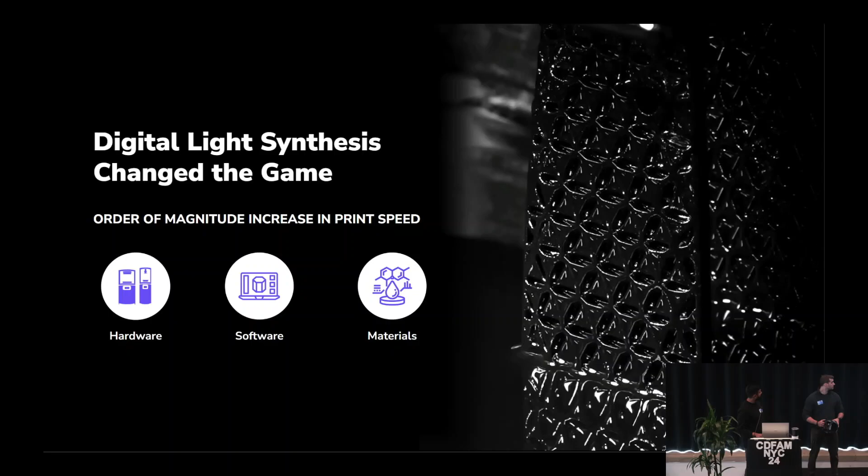So what we are going to go over is how we both worked with CCM to bring their custom helmet to scale. So a little bit about our background at Carbon. We have industrial hardware, design software and automation software, and engineering grade materials that all work together to build unique products in different spaces, from consumer to oral health, to protective padding, things like that.

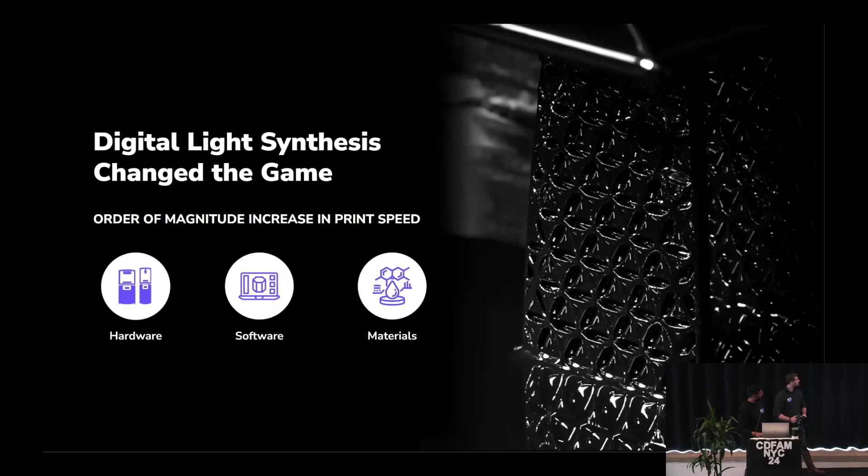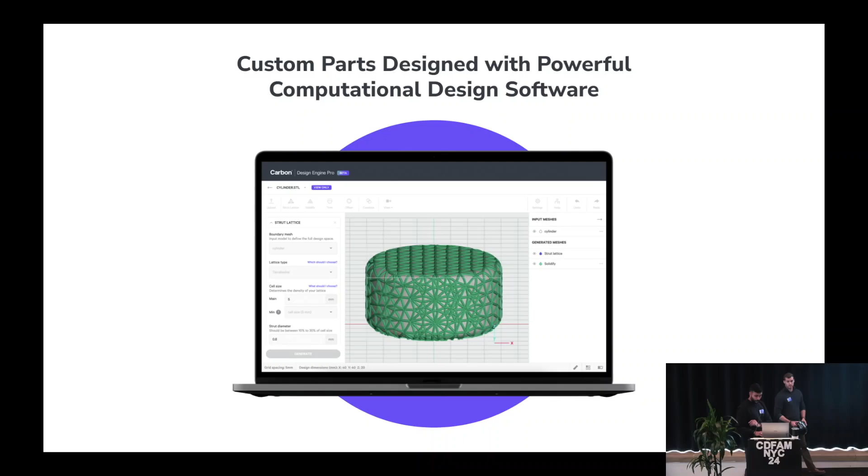So our vision at Carbon: we're really proud of all the products that we brought to scale, but we want to start moving more towards mass customization, to bring products to the masses at scale and build tools that are repeatable across different products and industries. So bringing it back towards CCM, we'll walk through it almost as a small case study, at least for our sections.

To be able to do that, you need innovations in computational design tools. You need to be able to bring in the custom inputs, you need to be able to automate, you need to get data and understand what's going on during the process. You need high performance materials that make sense economically for the customer, but also provide lightweight needs and fast print times. You need a true one-to-one product pipeline, right? To understand, hey, what's that scan data coming in? How do you use that data? And that's what the experts at Toolkit3D do.

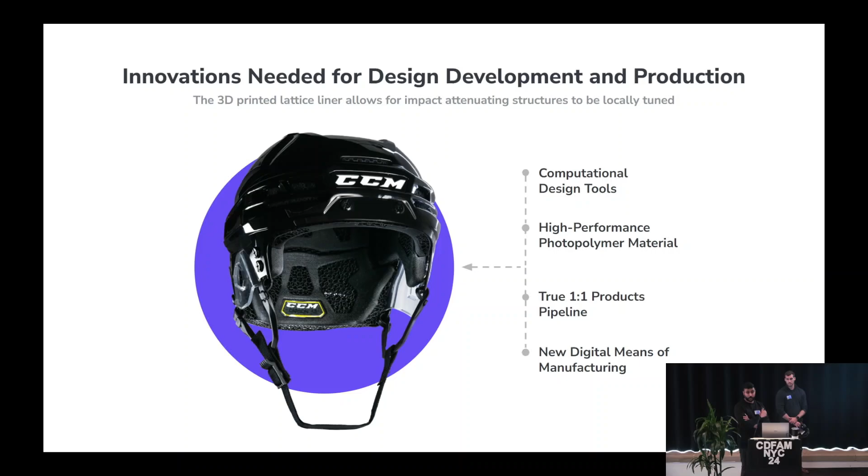And a new digital means of manufacturing, right? You need to trace that product through the system. You need to pack it. You need to put it on a build and make it efficient to print. So on a high level, I'm going to go through the design side of that CCM helmet. So where do you usually start? Some of you might have seen this in Slice Lab's presentation: a great place to start is understanding what lattice to use.

As applications engineers, you provide us with the material, we characterize it, and then we can use the thousands of lattice library elements that we have to narrow down what lattice might work for you. And this is available to all our Design Engine users. It's a mix of experimental data on lattices and simulation data, and then we fill in the gaps by interpolating from both. We've also recently plugged in commercially available foams as well. So if you have something you're already working with, you can understand the compression curve and find what sort of lattice works best for that.

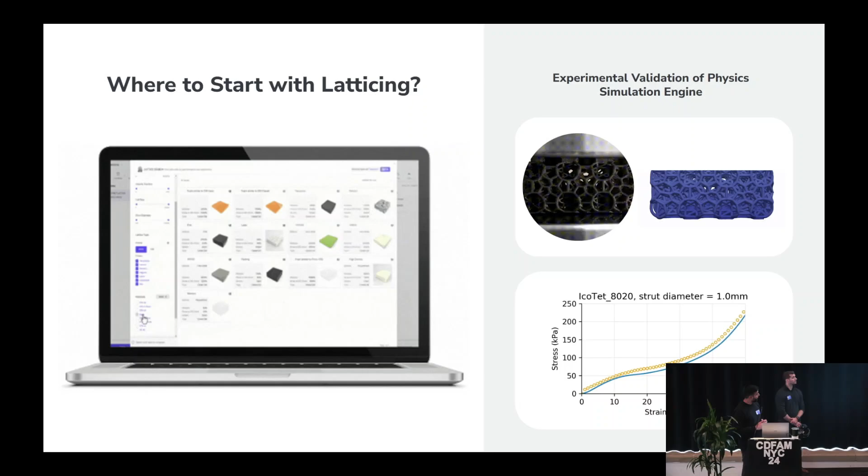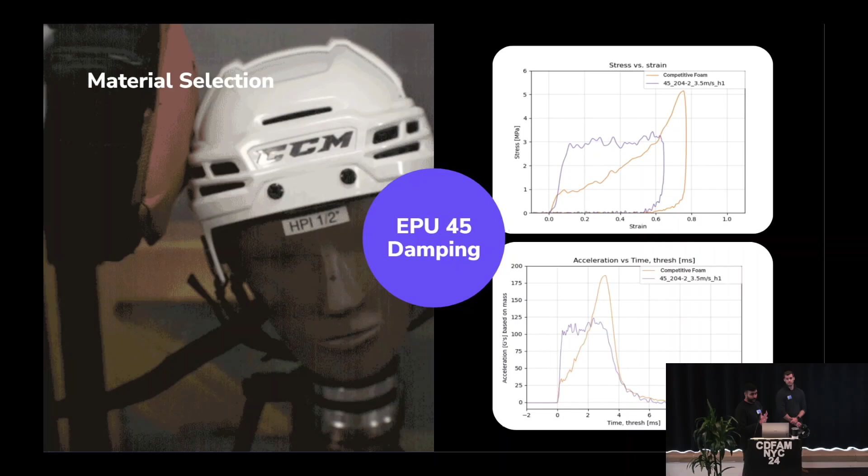Hand in hand, when we're trying to figure out what lattice works best, or at least narrow down the scope, we're figuring out what material also works best. For this project, it was a little bit easy because we have been developing EPU45, which is our premier dampening elastomer. It's strain rate sensitive.

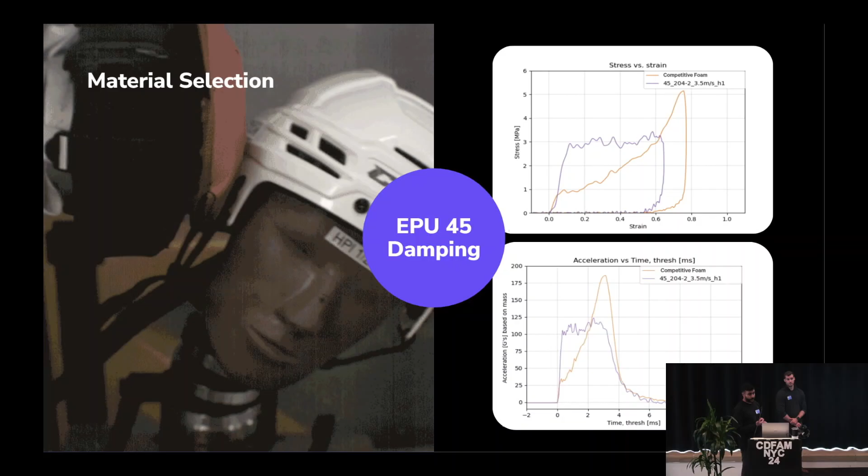So it was a perfect fit for this project. With this elastomer, we've actually been able to improve printability from our previous EPU 42, and we cut the print time down by over 70%.

Once you understand what material and what lattice you're going to use, we have to start tuning that structure. Within Design Engine, we've been able to use our advanced strut selectors. One example: we get the head form of the player, and we can understand what's normal to that head form to know where you can and cannot change strut diameter, where your performance struts are, and where you have other struts you might be able to cut down in terms of weight. So we reduce struts in the non-normal direction to bring the weight down for a player.

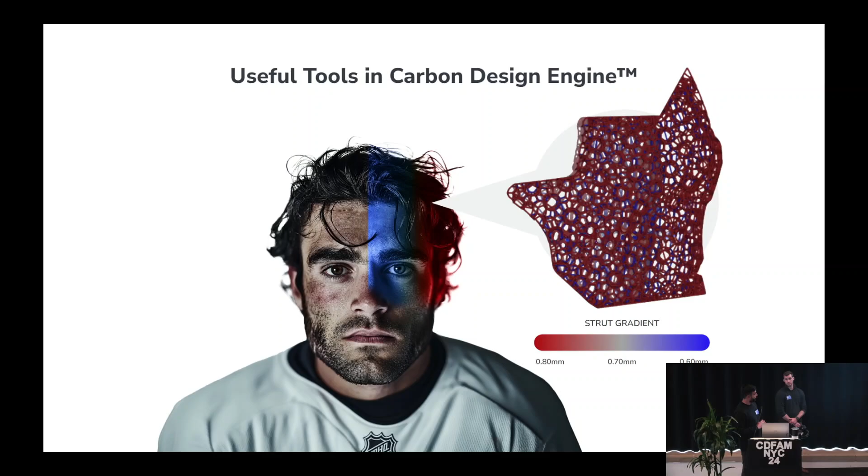Another thing is automation. In this process, you're working through a bunch of iterations. You have different scans coming in from the customer of different players that they want to test and iterate through. You need a quick way to do that versus starting a new project each time.

Within Design Engine, you can have a drop down at the top. You can tokenize your inputs, select the input, give it a token name, and download a script. For the CCM project, I've used that and built my own Python script on my desktop using this as a starting point, to be able to just run through helmets and helmets.

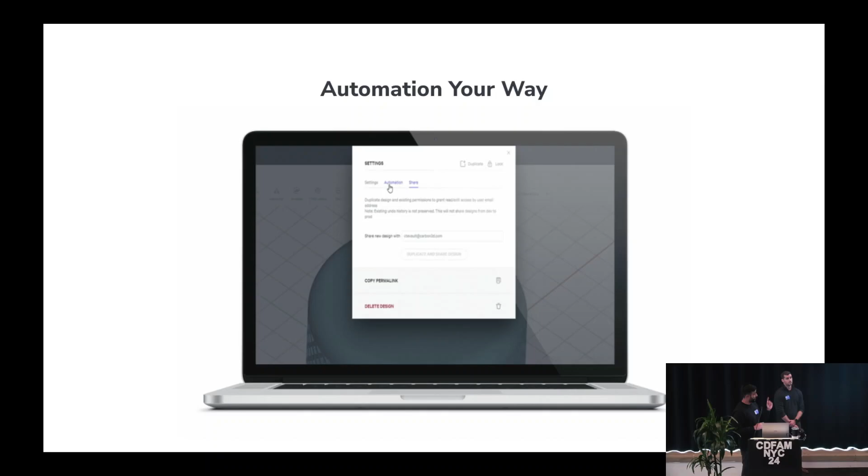And these helmets get very complex. From Toolkit3D, who processes the scan, we have 7 different inputs coming in for a goalie helmet. The goalie helmet has 14 different pads and comes in 3 different sizes. So you need a way to reduce the design time and iteration time, and improve efficiency.

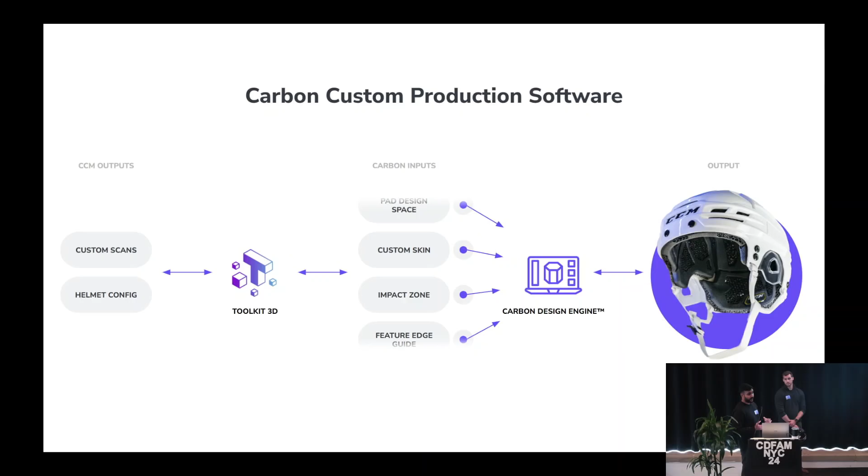And then you can imagine when you build this into an actual production workflow, the complexity you have to build in there. That's why we rely on people like Toolkit3D, who's our premier integration partner. We handle the design, lattice generation, and the print and production side of things, and they interface with us through our API to bring everything through for the customer.

So yeah, I'll pass it off to Jean-Philippe.

Perfect. So first, I'll take us one step back to show the initial input we had at Toolkit. In that project, we were both brought in independently, Carbon and Toolkit, by CCM. Basically, we were both pieces of the big puzzle that we needed to solve.

On their side was designing the pads, making sure they're printable, and following the guidelines for testing. On our side was how can we follow some guidelines and make sure that every single time we receive a scan of any player, we're able to generate the volumes adapted to their head, and stay within the constraint for morphing.

So it can be either maximum thickness and minimum thickness to stay within test standard, or it can be printability assessment, making sure some surfaces are flat so they stick properly, we don't have overhang, or don't need any support, so we can optimize the print as much as possible. That came as our design engine.

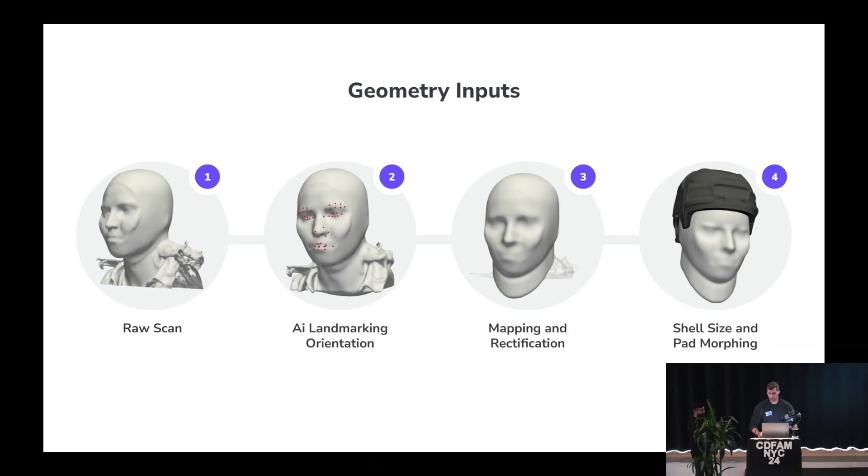So basically what we're able to do through our rectification and measurements, first we're going to fit into the right shell, hopefully minimizing the pad thicknesses to minimize weight. Then, following the match to the right shell size, we're going to be able to morph the pads to properly fit your head. The pads are comprised of course of the volume, but also their skins for sweat and comfort that are morphed at the same time, and then pushed to the carbon design engine.

This is all fun and everything, but we soon learned, all 3 of us, that was only one piece of the puzzle. Because now we had, not necessarily one piece of the puzzle, we now had all of the pieces, but we needed to put them back together into the final picture. Because we have now a product, we have a scan, we have scan processing, we have morphing, and we're able to lattice it and print it.

But what happens when we move that product into production? We're talking about a complex product, multiple design engines, multiple steps. How was this being done initially? Of course, we were using email and SharePoint. How can we scale production for hundreds and hundreds and thousands of players in the future? That was one of the biggest pain points we figured out with CCM, and this is where the order management came in from Toolkit.

So basically, it's a play on words, who would have thunk, but Toolkit is basically an open toolbox. We're there to bridge the gap between different pieces. If you don't have those pieces, we're going to help you build those pieces, or you can bring your own. In this case, we have the Carbon design engine, we have the Carbon platform for printing, and we have some scanning app. So basically, we're bringing some of our own tools, but also connecting with existing tools to remove human interaction and delays that aren't necessary.

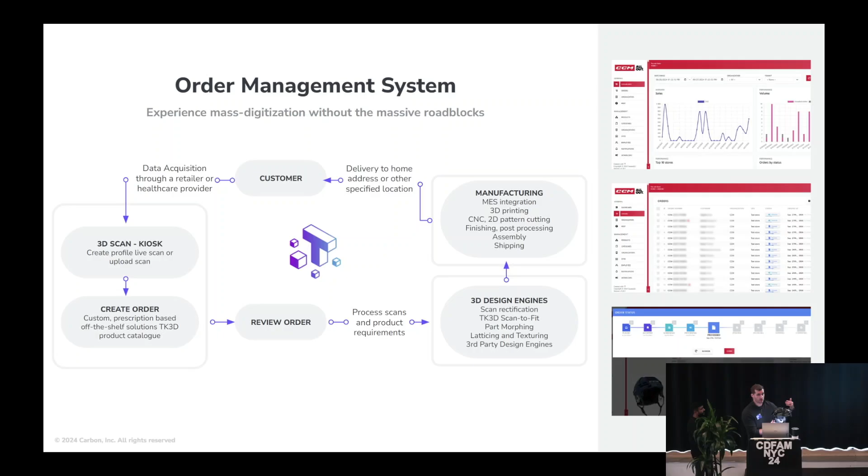We are also able to keep traceability through the whole production. As you can see, this is just a quick view on the right side of our platform, but you have KPIs on ordering - you're able to track how many orders are going through the platform every week, month, year. You're also able to track every single product at what step it is during the production line.

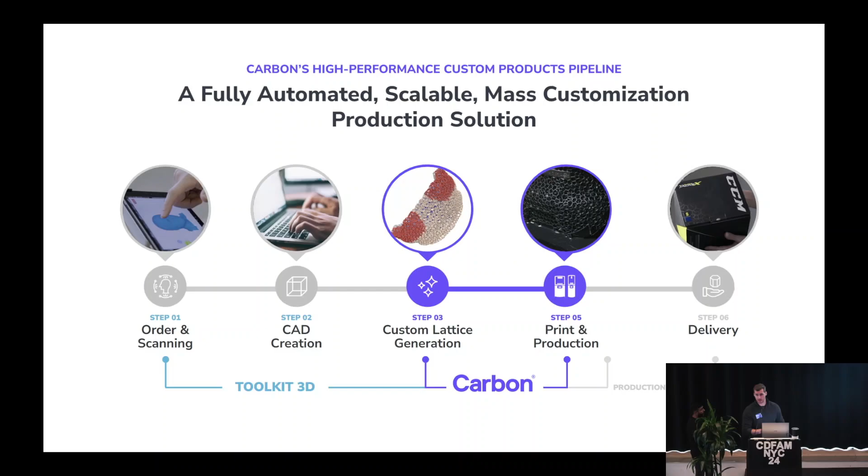So if we go back to our flow, basically we've been able to figure out the first 5 steps, so up to print and production. But right now, the next step we're trying to figure out is going to be production.

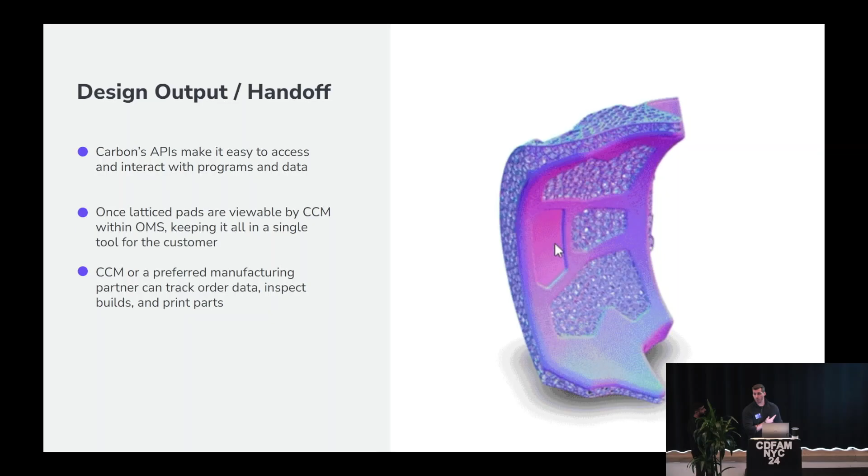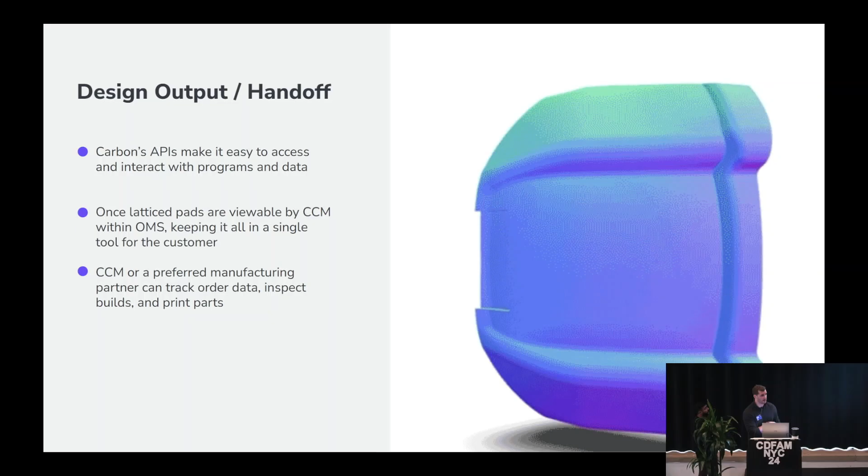Right now we assess that Carbon's APIs are easy to access and interact with. We can even connect with their fleet control, allowing us to see when parts are being queued, when parts are being printed, and even know what's the time left on that specific print, bringing all that back to the OMS platform. So basically the CCM or any partners into the production line, including printing partners, have a single place of truth in the OMS. No need to move from engine to engine, no need to move to different software. Everything is streamlined and available on a single platform.

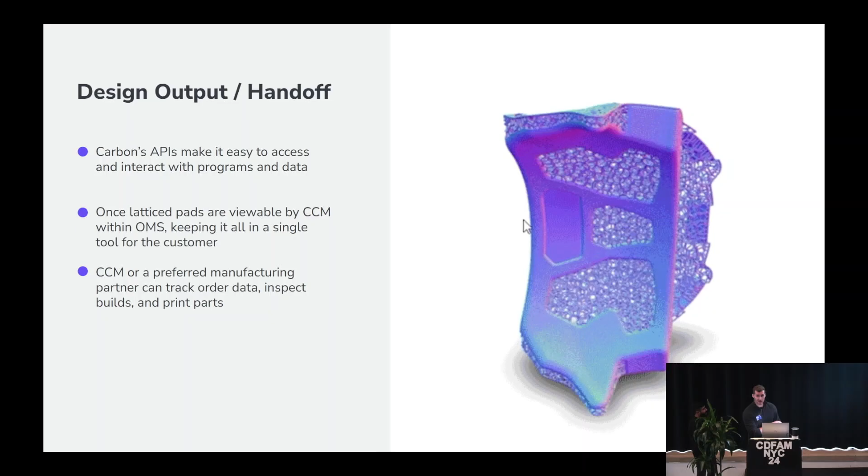We can even input some QA steps. There's a viewer on the platform, so between the morphing, once you have the lattice part, you can check in real time and make sure that everything is following the process before you send it to the next step. Of course, we want to print functional parts.

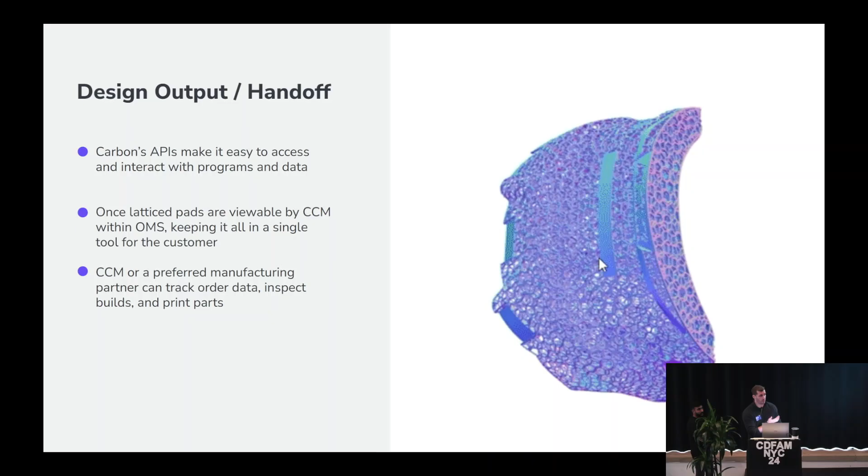Pushing even further, Carbon continues to develop new tools like the Carbon Automatic Print Preparation software. The next step is taking every single one of those elements being produced and automatically creating nest files, nest builds that can be put in a queue automatically. We're also planning, through the printer network they currently have, to be able to distribute the order according to different characteristics, like geography.

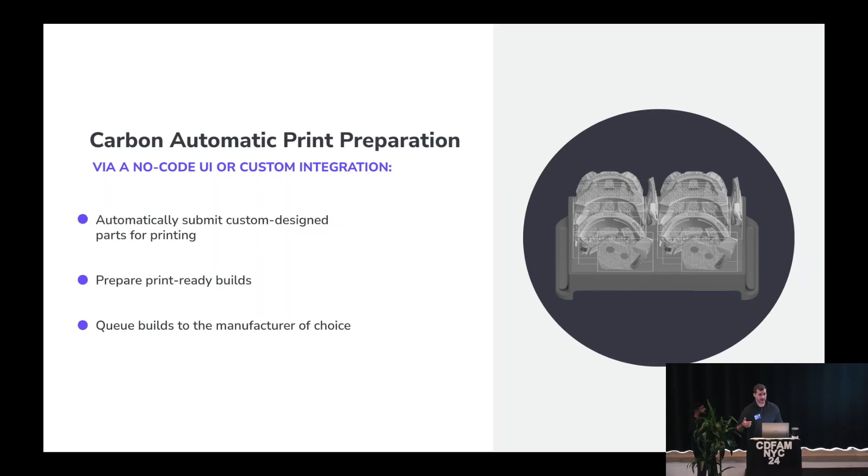So basically, if you're in Europe and you want to order a helmet, you're not going to print it in North America. You're going to want to print it somewhere closer to home, because why would you ship the parts across the pond? That makes no sense. And also, through your production network, you ensure that you have printer availability once you're creating orders.

We also right now have taken delivery of our L1 printer, and this is multiple folds. First of all, it gives us access to the architecture, the software, allowing us to understand a little bit better, play with it, and better build tools that can create synergies.

But also, we have a lot of customers coming to us asking for product development and consultancy. We're going to use the design engine, build some parts, and do quick turnaround prototyping to hopefully show them the potential of additive manufacturing and Carbon technology.

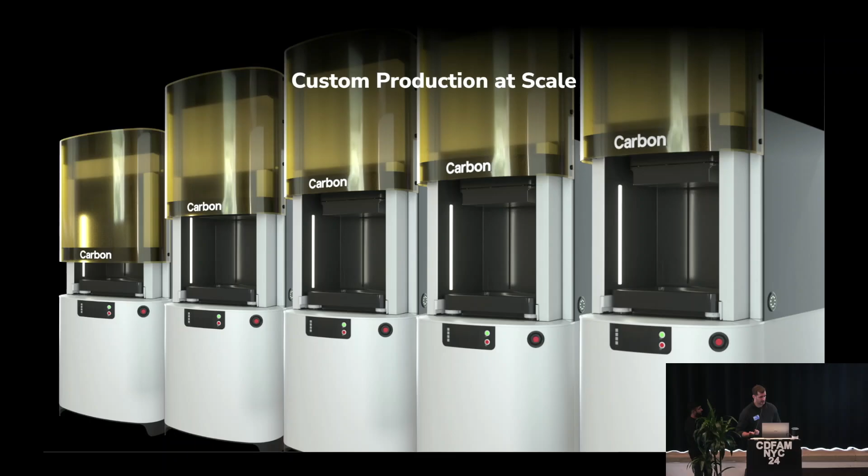So basically it was sales reps going into pro locker rooms getting them scans. Right now, CCM is releasing those scanners into shops. Sorry, I'm from Canada, so I might name drop some shops you have no clue about, but those are the ones I'm used to—your Sport Experts, your Sport Rousseau. Basically any sports shop you go into, they're going to be trained, they're going to have the scan app, and everyone's going to be able to order a CCM custom helmet.

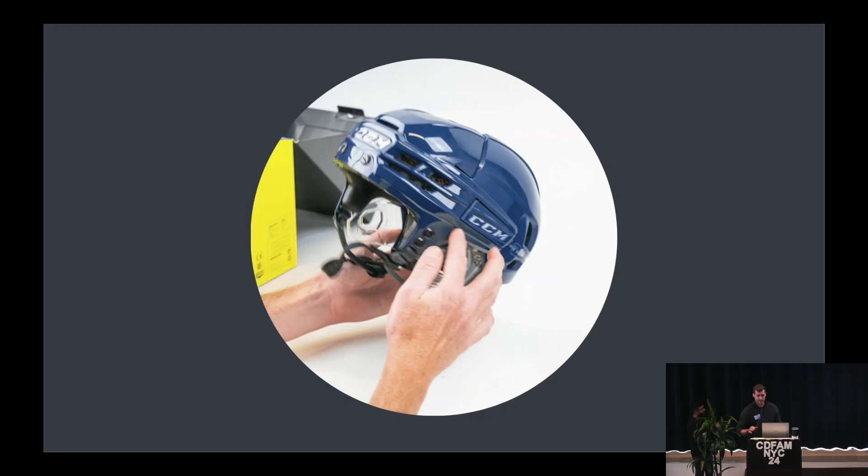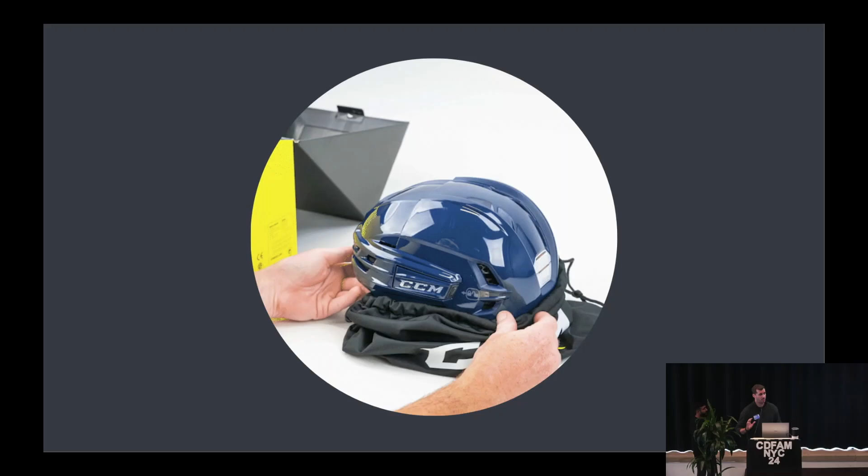Basically, the holy grail of what we're trying to achieve with them is, from order to delivery to customer, we want them to have the helmet within 10 days. With what we've already built together, we've already been able to remove between 3 and 4 days from that workflow. So still a work in progress, but showing a lot of promise.

I really need that coffee. I think I see some people sleeping too. I think some other people do too.

So we are growing our customization solutions. With prosthetics, cushioning, we have things out there, but we are looking to grow further. If you guys have products that can grow with us, and even thinking of it in your prototype space, iterating through products, if we can help with our design engine or the full final production scale option, come talk to us.

We do have some samples to show. We have helmets to try on the booth right there. So yeah, happy to talk to you guys. Thank you for your time.